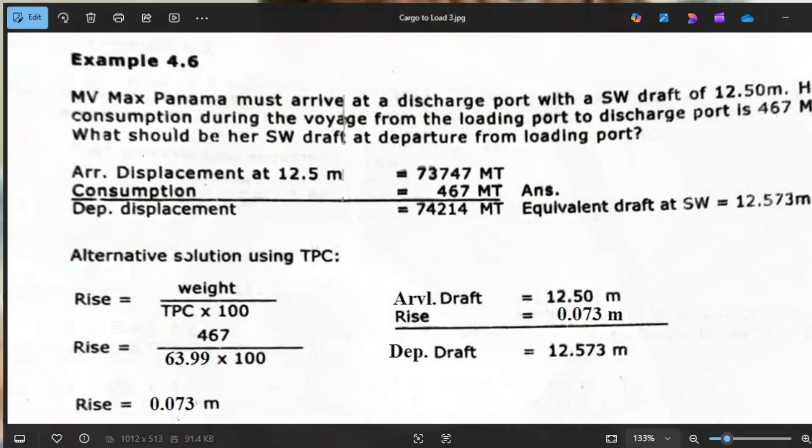So let's just read the question, guys. MV Max Panama must arrive at discharge port with saltwater draft of 12.50, meaning his arrival draft at discharge port is 12.50 meters. Her consumption during the entire voyage from load port to discharge port is 467, meaning at the time of departure from load port to arrival at discharge port, the consumption of bunkers or fuel oil, diesel oil, lube oil, fresh water is 467 in total metric tons.

The question is, what should be her saltwater draft at departure at load port? Meaning, what is his draft upon leaving the load port? Or what is his departure draft upon leaving the load port? Okay, so here's the solution.

He has arrived at discharge port with a draft of 12.50. What is the displacement? Displacement is 73747. So we'll try to double check this one, guys.

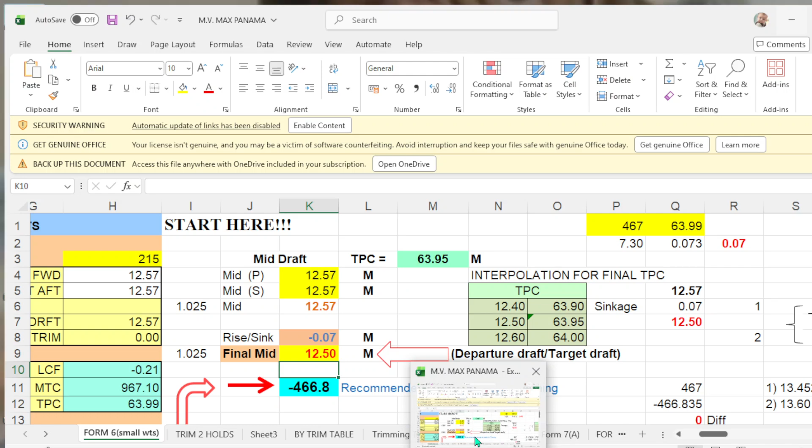Displacement is, go to the draft, 12.5. Just put here 12.5. Displacement is 73747.

Then you add this consumption of 467, which is this one. You add because you're going back to the load port. So you add 467 to the displacement of 12.50, which is 73747. You add this one, that will be 74214. So what is the equivalent of this displacement?

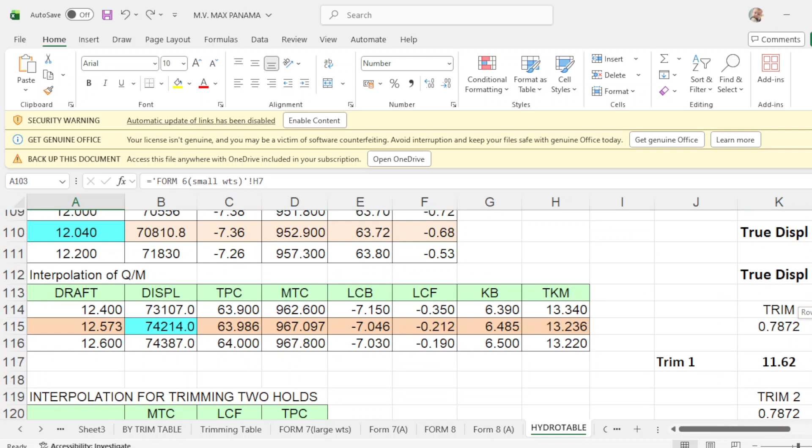That will be 12.573 in salt water. So we'll double check, guys. 74214. Push enter.

And that will be 12.573. So this is your departure draft at load port. From here, you consume 467 metric tons and your arrival at the discharge port will be 12.50.

And here's another solution, which is rise equals weight over TPC times 100. And what is your weight? It's 467, or your consumption. And what is the TPC of 12.5?

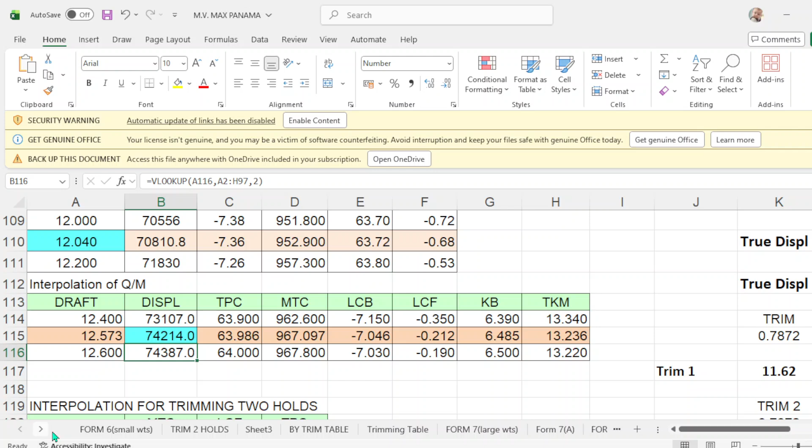We go to the program, here 12.5. We go to the hydrostatic table, say 12.5. The TPC of 12.5 is 63.95. The TPC of 12.5 should be 63.95, or I got to 63.99. Why 6399? I will explain you later. But I made it 6399. Okay, I'll explain it later.

I go to now. Alright, just finish this one first. So I got there 63.99 times 100. Your rise should be 0.073. And 0.073 plus your arrival in discharge port, this will be your departure in loading port of 12.573.

The same here, okay? Because with this figure of 6399, what I do is 467 divided by 63.99 divide 100, then you get this figure of 0.073 meters. You add this to your arrival drop at load discharge port, and your departure at load port will be 12.57. So I'll prove this by the program.

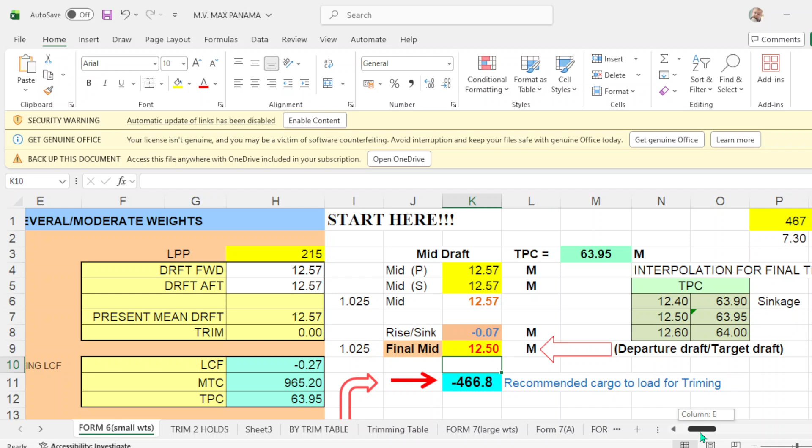Okay, so here, this is your departure drop at load port. Put here 12.573. Forward and aft is 12.573. And your mid port is 12.573. And your mid starboard is 12.573. And your mid drop will be 12.57.

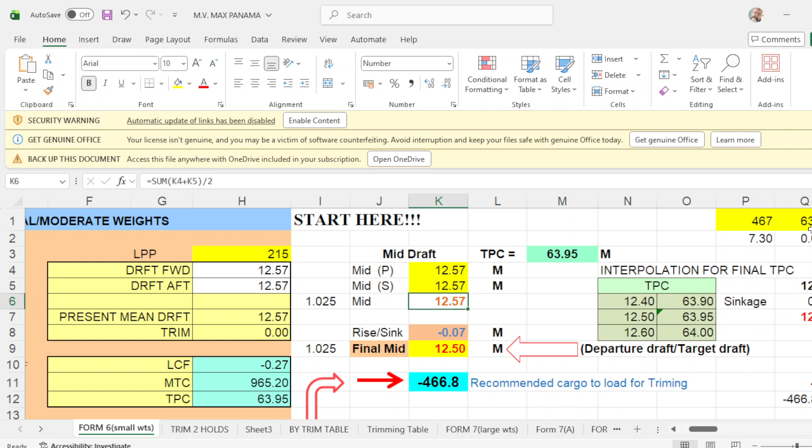Okay, take note, the TPC of 12.573 is 63.95. I got here 6395. See, I just put it here. And the weight consumed from load port to discharge port is 467. Okay, take out this first. So from load port to discharge port, consumption is 467, and the TPC of departure drop at load port is 6395.

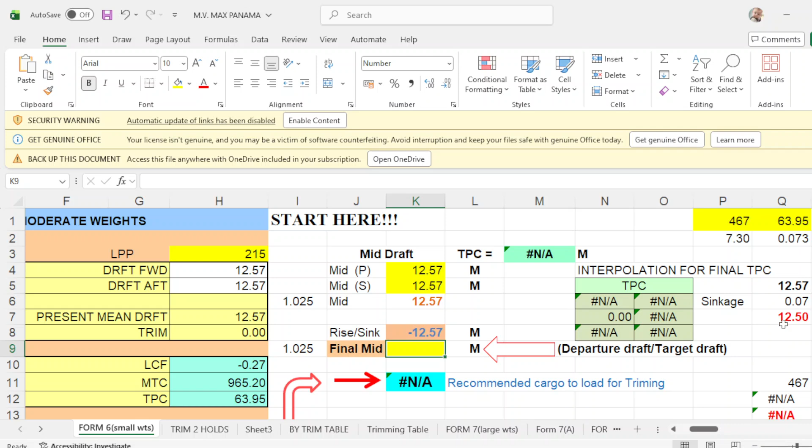So I put here 6395. So 467 divided by 63.95, that will be 7.30 centimeters divided by 100, that will be 0.073 meters. Okay, that will be in meters. Now I put here the, this will be the departure drop.

This will be your departure drop at load port of 12.57 minus your sinkage of 0.07, and this will be arrival drop at discharge port, which is, it says here, your arrival at discharge port is 12.50. Okay, so this is what I computed.

So since you have already know your departure drop at loading port, which is 12.57, which is the mean, minus this is your rise. Okay, this is not sinkage, this should be rise. Because the vessel will float or rise, it will rise because you're already consuming of 467 metric tons. So when you consume fuel oil, the tendency of the vessel is to rise. That's why you subtract this one and your arrival draft at discharge port will be 12.5.

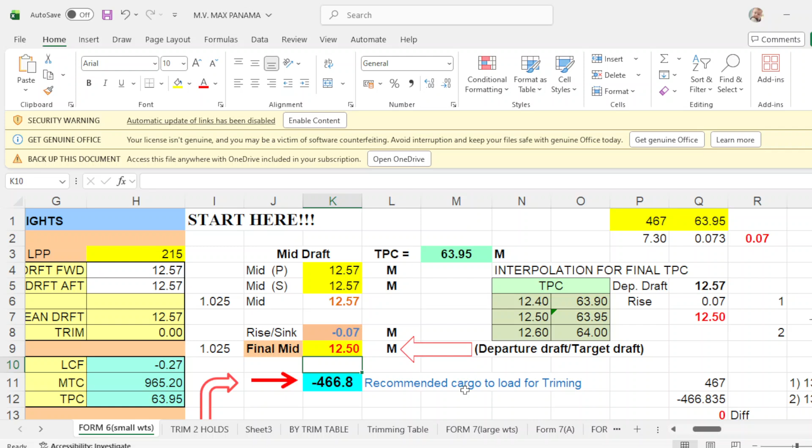Now, this will confirm that you will consume of 467 by the formula, by this formula of rise equals weight divide by TPC divide 100. Okay, for example, what is your weight? It's 467, put here equals 467 divide with your TPC of this one, divide by 100 with this formula and you press enter, your rise is 0.073.

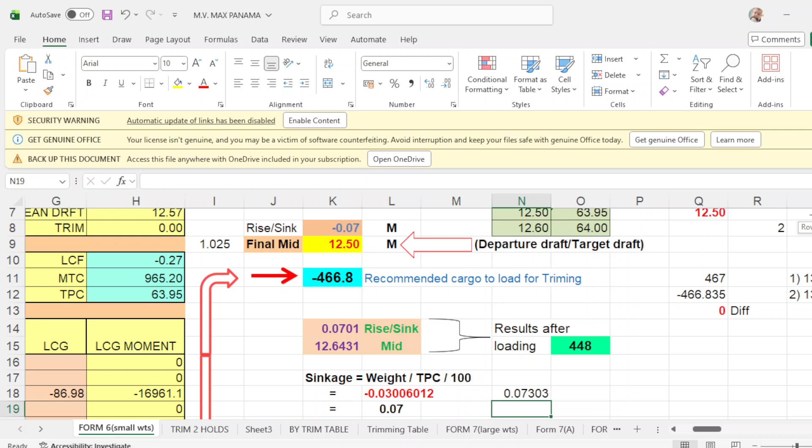Okay, or the same, that will be your rise, or this one. So the value that the sinkage will be 0.07. Okay, just take this out.

This is also the same formula with this one. Okay, let's say your weight is 467, 467, 467. Your TPC is 6395, 6395. Then you press enter. Then you will have 0.073, negative because it's rise.

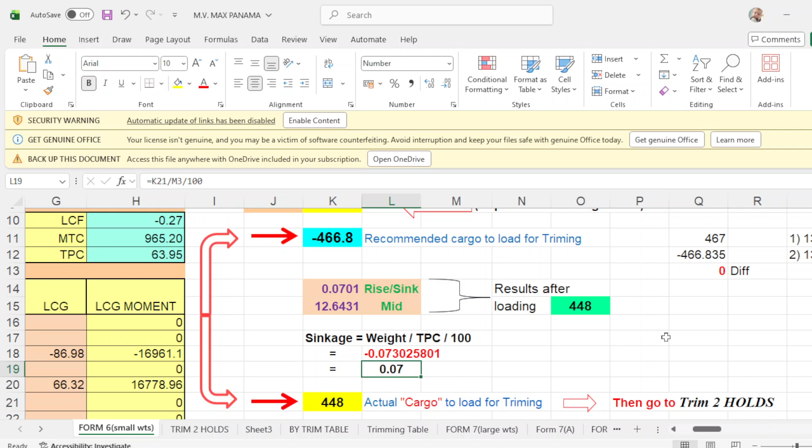Since you have already this rise, what will be the amount to be consumed from load port to discharge port? The formula is rise times TPC times 100. So what is your rise? It's K8, K in 8. And times M3, your TPC is M, this letter M, and 3, which is 63.95, the interpolation of your arrival draft in discharge port. With 12.5, you interpolate the TPC and you will get 6395. That's why I use M3.

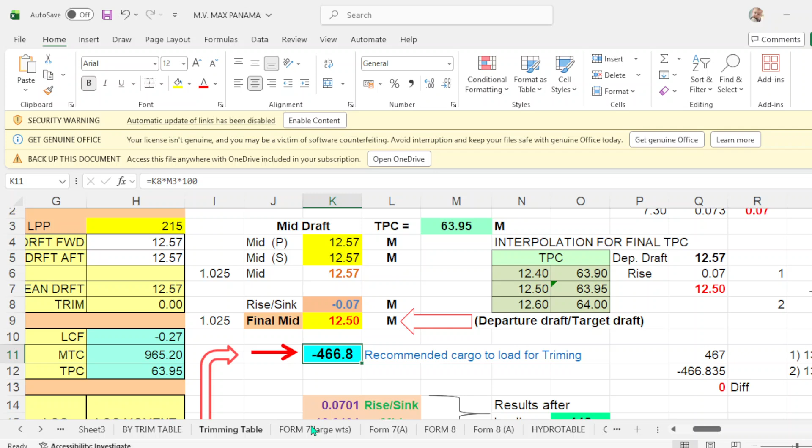Okay, I forgot this one. No, that will be number 12.57. Let's see, I think there's something wrong with this. Sorry, double check this one. This is for number 6. You put it equals, then you go to form 6. I'm sorry.

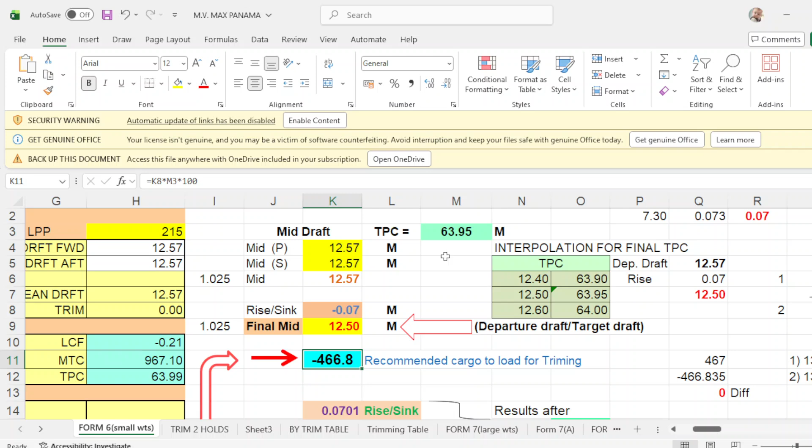Okay, again we go to the hydrostatic table. Excuse me, hydrostatic table equals, put equals here. We go to your mean draft of this one. This is your mean draft. And press enter. And your TPC should be 6399. Okay, that will be 6399. And your, okay, 6399. Put this to 6399, okay, 99.

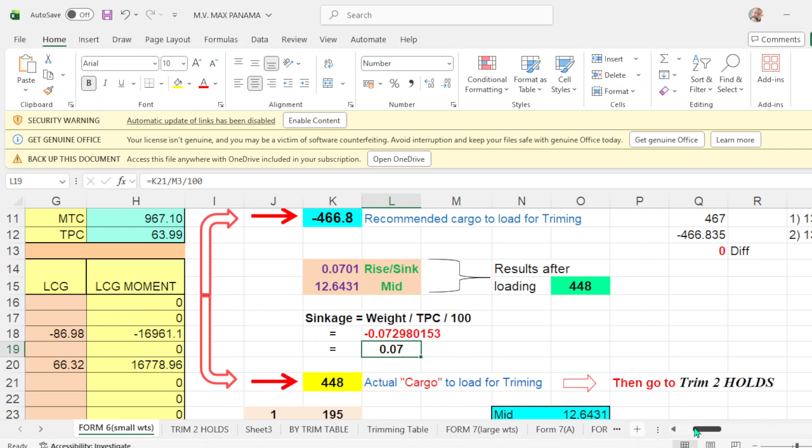You will still get negative 0.0729, negative 0.0729, okay. Again, this is to confirm that your consumption is 467 with this figure. Okay, how did I get this figure is...

Okay, it's your sinkage of 0.07 negative times M3, which is your TPC, M3 TPC of your 12.5 arrival in discharge port, times 100, okay. And the value will be negative 6447, 466.8, which is almost 467 if you round off. So this is just to confirm that this is correct. The consumption is 467.

Of the consumption now, we just follow this formula, okay. What happens if you consume 467, okay, so this is 467, you put 467, enter. That will be, you put negative, okay, because you're consuming, negative.

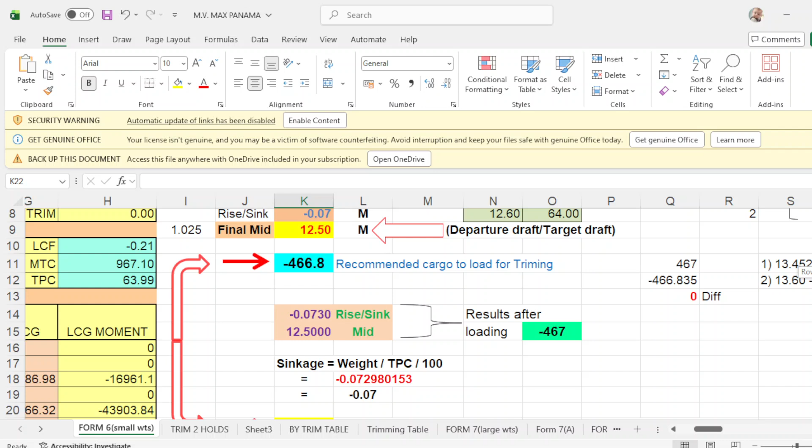Then you will get the exact draft. When you consume 467 metric tons, your mean draft arrival in this port will be 12.5, the same, and your rise is 0.073, negative, which is almost the same here, 07.073. Okay, so this is confirmed now that this is the consumption of 467 is correct, that we are to consume from load port to discharge port, and your arrival at discharge port will be 12.50.

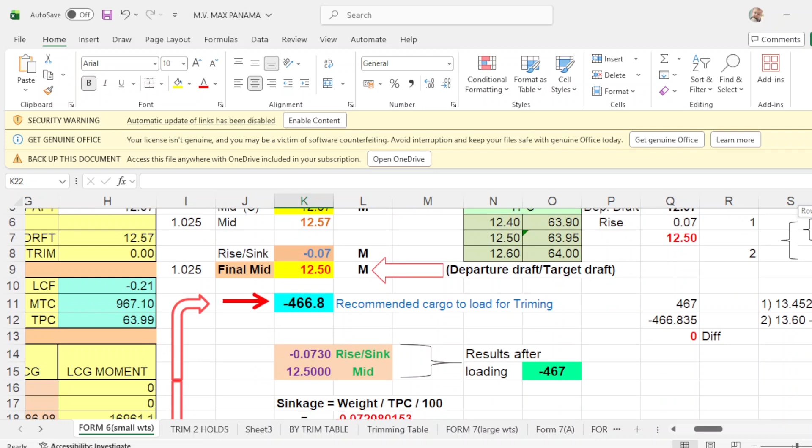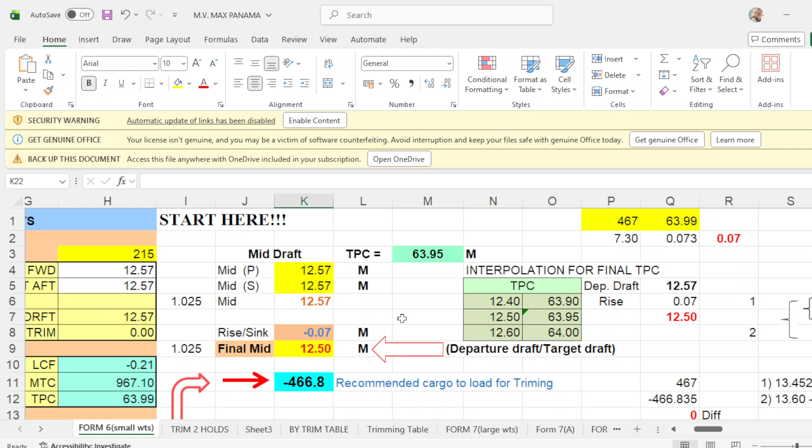Now, for example, instead of using bunkers, fuel oil, lube oil, fresh water, we will try to use the cargo, okay. So in cargo, you go to trim 2 holds, okay, you go to trim 2 holds and take note of the remaining cargo or the weight, which is negative 467, and this is your initial draft or your departure at loading port, okay. This will be your mean draft also. This will be your TPC, LCF, and MTC.

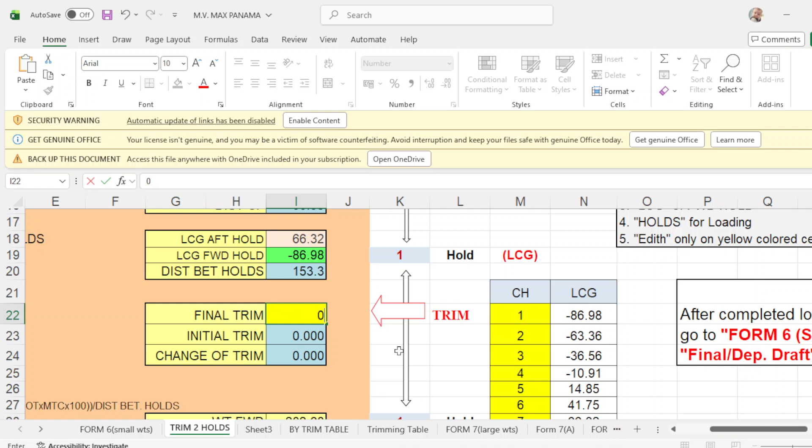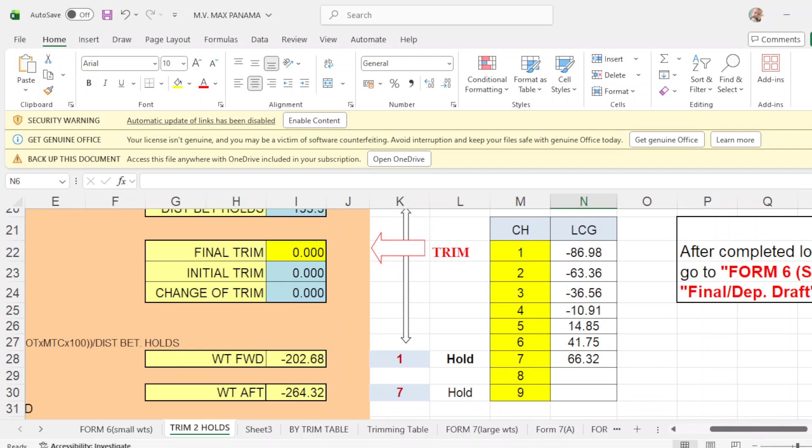For example, you want to discharge in 1 and 7 to arrive at 12.5 at discharge port, okay. So you say 1 and 7, and you want to arrive at discharge port at even keel. So you put no trim, that will be 0, okay. And how much would you discharge in hold number 1? He says you discharge in hold number 1 of 203, so round it up, you put here 203 negative, 203, because you're going to discharge cargo. And number 7, you're going to discharge 264 of weight of your cargo, 264, okay. And your arrival in discharge port will be, for example, 12.5 forward, 12.5 aft, trim 0, and 12.5 mean.

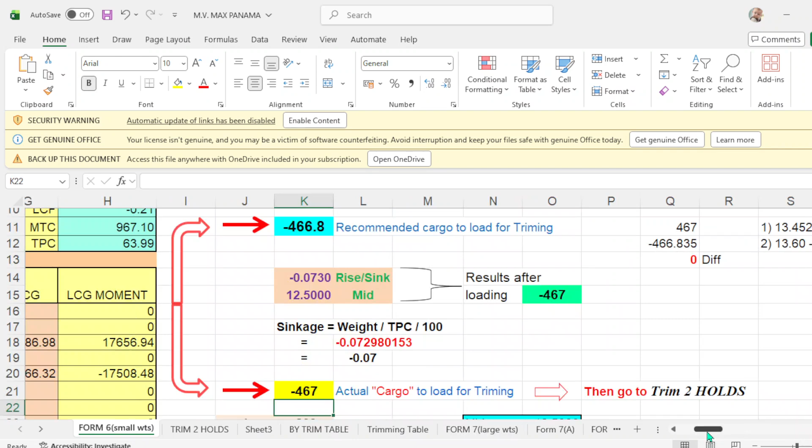And this formula, or this program, is how to find trim when handling several moderate weights. This is your departure in your load port, and this will be your arrival. So in number, take note, in number 1, you discharge 203, you have 203 here, and you put the LCG, and number 7 is 264, then you put the LCG, and your arrival at discharge port will be forward 12.5, aft draft with 12.5, no trim, and mean is 12.5. Okay, then you have here 0 difference because the mean draft and mean draft are the same.

How did I get this mean draft? You put this equals, okay, then you go up.

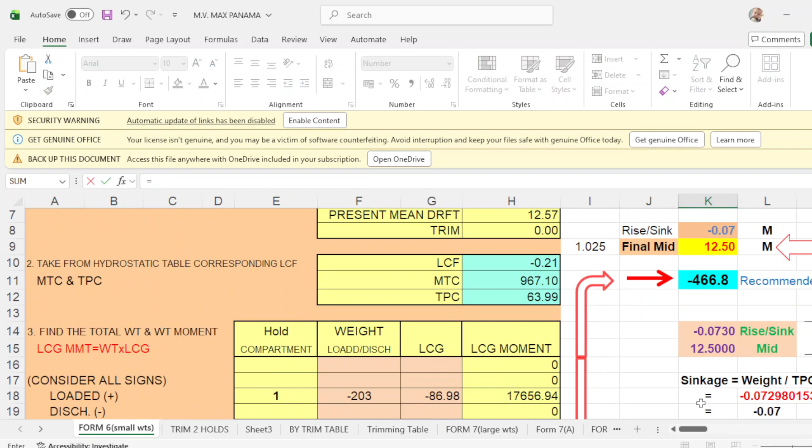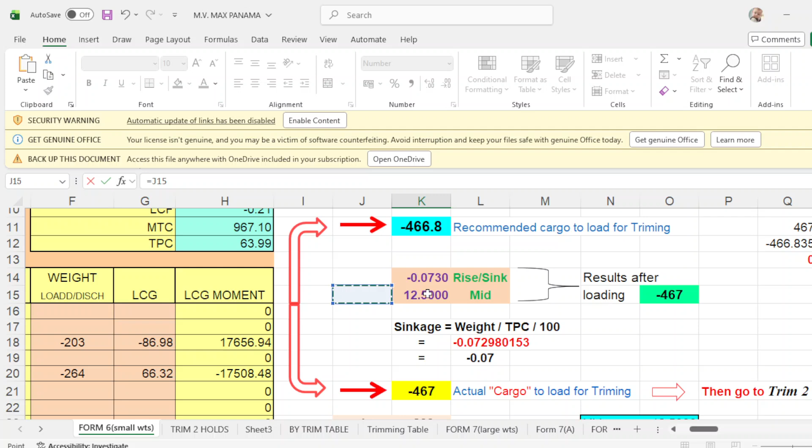This will be your mean draft because you already discharged 467. Click this one. That one and enter, then you will have your mean draft. And your mean draft equals this. Enter, and this exactly, difference is 0, 0, okay? This is how good this program is. This will show you how this program works.

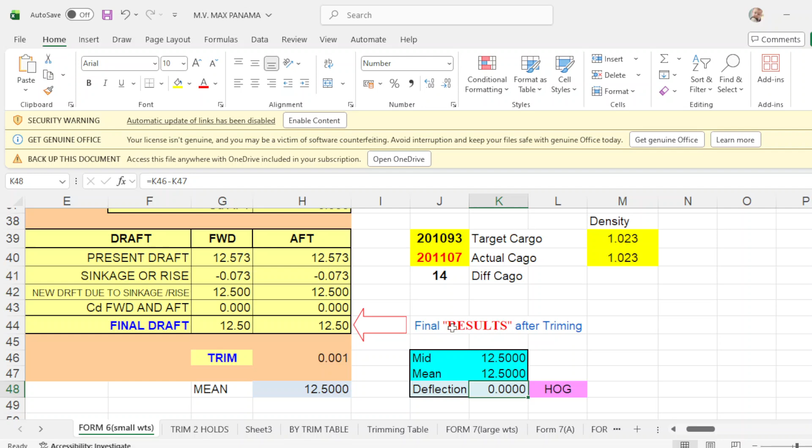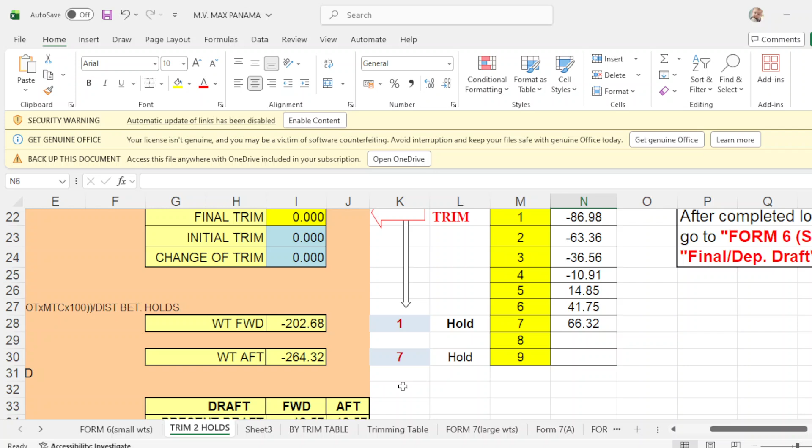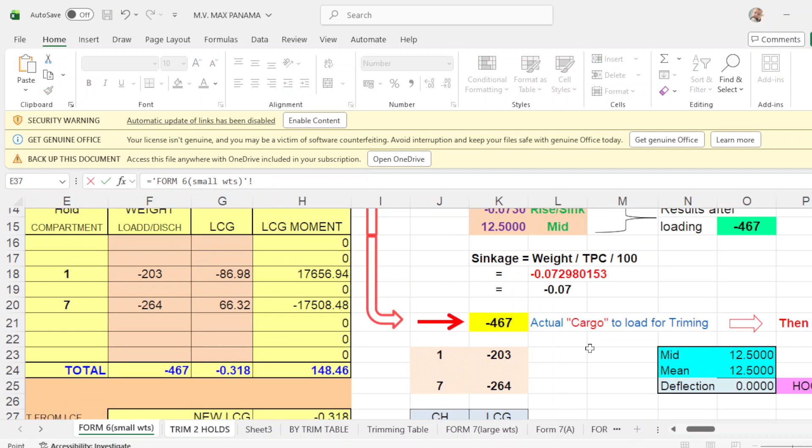And trim 2 holds, this is your cargo to be discharged in hold 1 and 7. We have already going to discharge number 1 of negative 203 and number 7 is negative 264. Upon discharging this 1 and 7, your forward draft will be 12.5, aft draft will be 12.5, 0 trim, and mean is 12.5, almost 0, almost the same. Deflection is 0. Again, how did I get this mean draft? You put equals, I press equals, then you go to form 6, you go up, and click this one. Enter, this one, and your mean, press equals, then this is your mean, enter, and so you have a 0 deflection. Then we go to the trim table.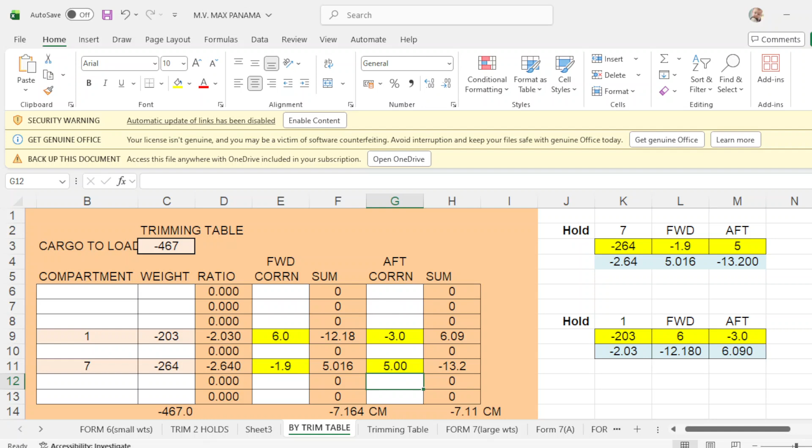Take note, trim table: you have to discharge 467. In number 1, you have to discharge 203. Number 7, you're going to discharge 264. In your hydrostatic table, look for the forward correction of hold number 1, which I put here as 6.0, aft is negative 3.0, and 7 is negative 1.9, and aft is 5. That is in meters, and your departure, arrival draft, load port, discharge port is even keel of 12.5, and your deflection is almost 0.

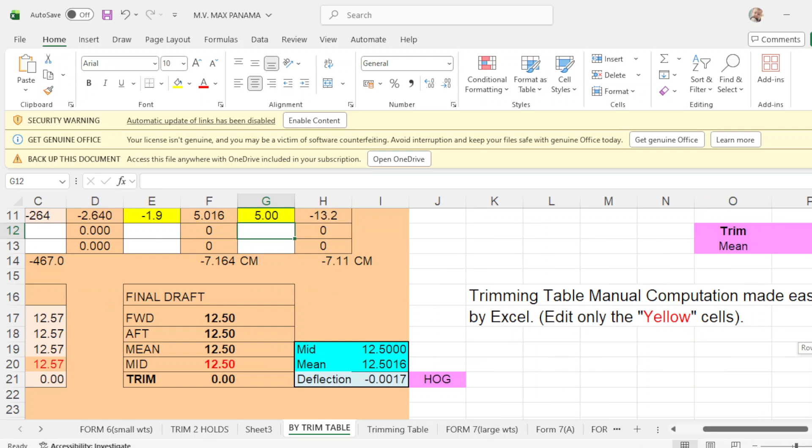This is the reverse. Instead, you have to discharge first in number 1 so that you will have a good trim. But this is discharge. If you are going to load, you should load in number 7 so you will have a good trim. Then you load in number 1. But this one is the reverse, because you are going to discharge. That's why I never changed the sequence of the loading.

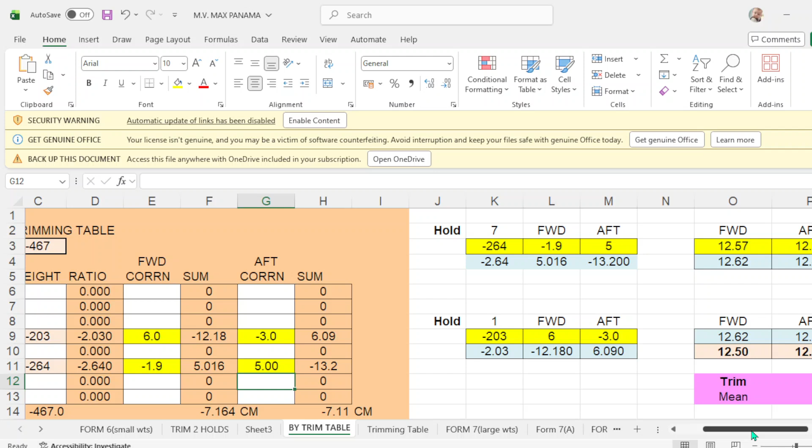But anyway, if you are going to discharge in hold number 7 of 264, which is the same here, the same correction forward and aft. Number 7 is 1.9 negative and 5 meters here. After you complete discharge in number 7, you discharge in number 1, and the weight is 203, which is the same here. Forward correction is 6, you have the same here, 6. Aft correction is negative 3, negative 3. So this is the initial draft of 12.57 in the load port.

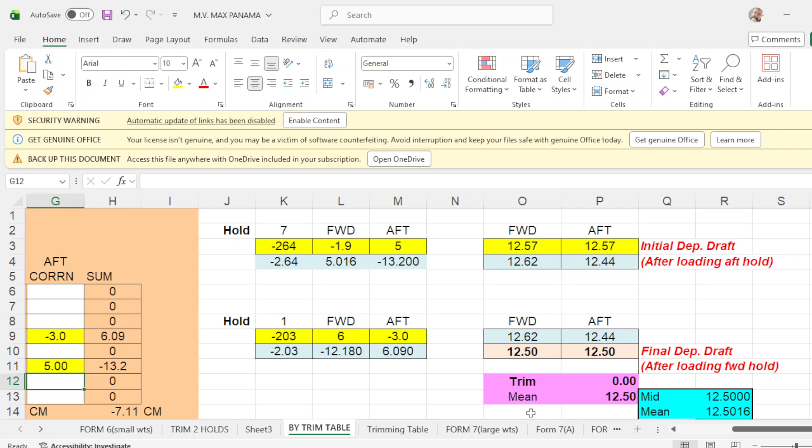After discharge of 264 at hold number 7, this will be your draft of 12.62 forward, 12.44 aft. You are trimmed by the head. Then you discharge in hold number 1 of 203 metric tons. Upon completion of discharge of 203, your forward draft will be 12.5, aft draft will be 12.5, you have 0 trim, and mean draft is 12.5, and your deflection is 0.

So we have 4 programs: form number 6, trim 2 holds, and this is a trim table. Then the last one is how to find draft and trim when handling weights involving large changes in mean draft.

Remember, the program, the vessel is floating in seawater. So also in the discharge port, loading port, also seawater. Okay, you go to the program. So 12.5, this is your arrival in discharge port. With 1.025, 12.5 here, forward and aft is 12.5.

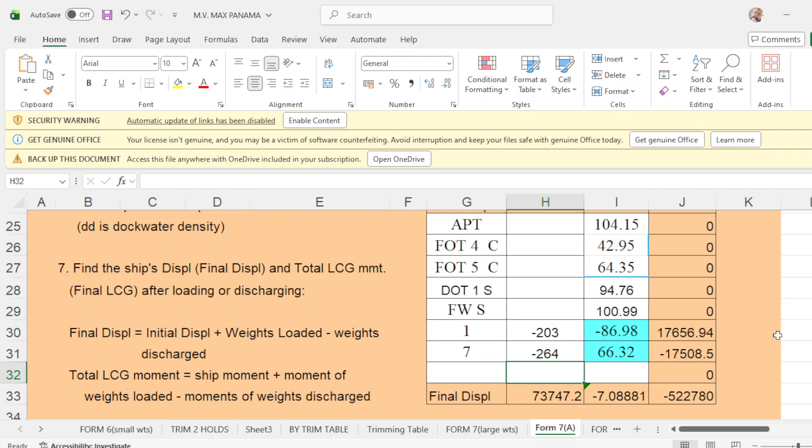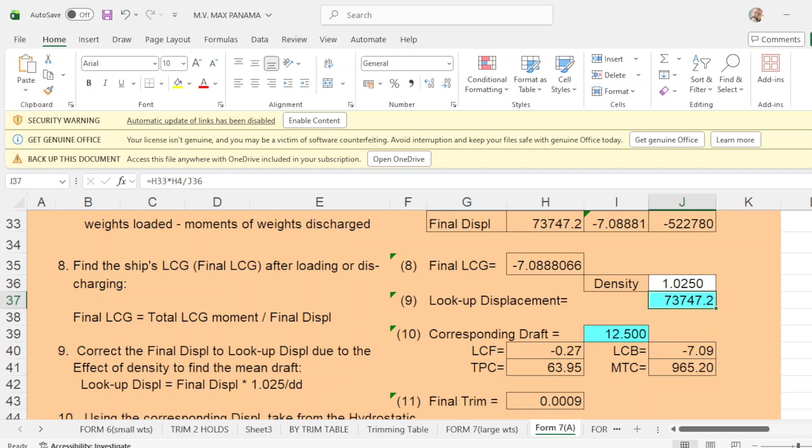Okay, we just put this 12.57, this will be 12.573, this will be 12.573. This is your departure from load port. And you discharge in number 1. How much you discharge in number 1? Negative 203. You put negative 203 because you're going to discharge. And number 7 is negative 264. So discharge negative 264. And your final density in arrival at discharge port will be 1.025. Your arrival draft at discharge port will be exactly 12.5 forward, aft is 12.5, mean draft is 12.5, and you have a 0 trim.

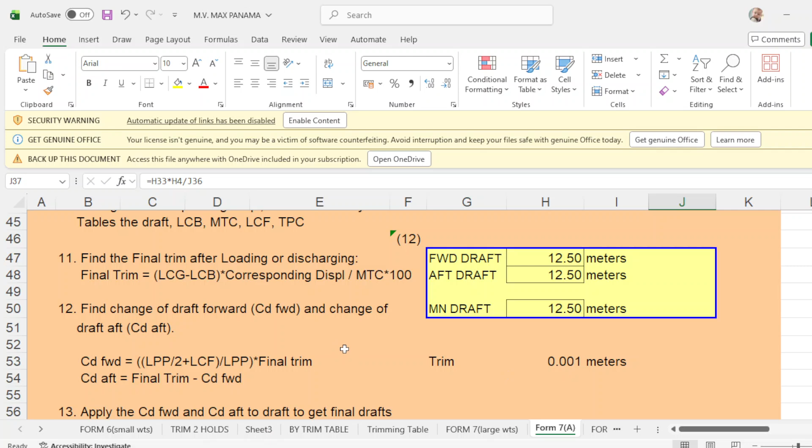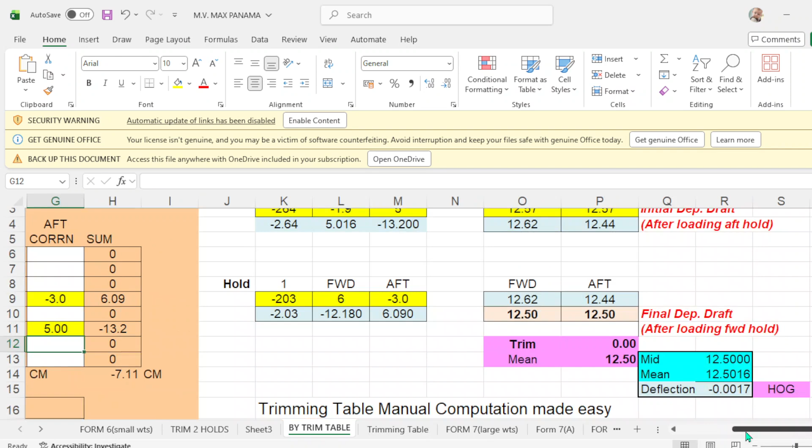So you have 4 programs. This is form number 7, which is how to find draft and trim when handling weights involving large changes in mean draft. Then you have your trim table. Your arrival draft at discharge port is even keel of 12.5, mean 12.5, and 0 trim. And you have 0 deflection.

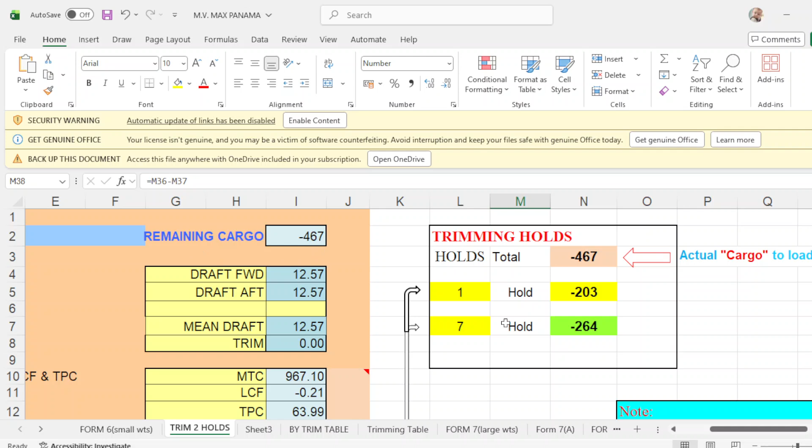That's number 2. And number 3, trim 2 holds, trimming cargo. This is your cargo to discharge. This is your trimming hold. And your arrival at discharge port forward is 12.5, aft is 12.5. 0 trim, mean draft is 12.5, and you have 0 deflection.

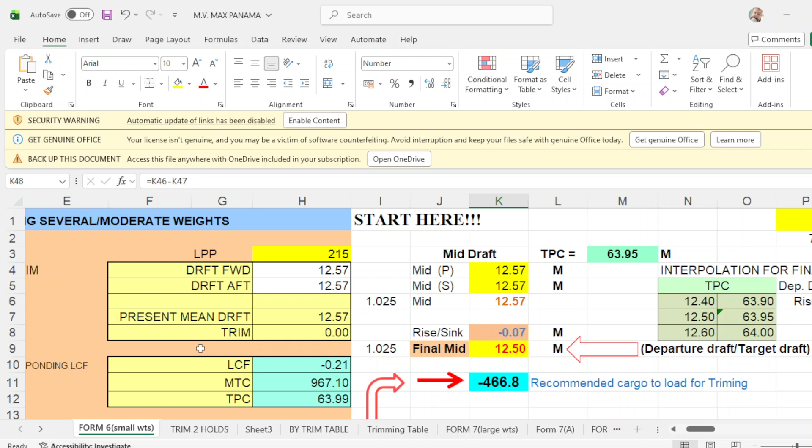And now lastly, number 4, which is form number 6, which is how to find draft when handling several moderate weights. Here you discharge number 1 of 203, number 7 of 264, and your arrival draft at discharge port will be 12.5, forward and aft will be 12.5, and your trim will be 0.1, 0 trim. Your mean is 12.5, and you have a 0 deflection. Exactly the same here.

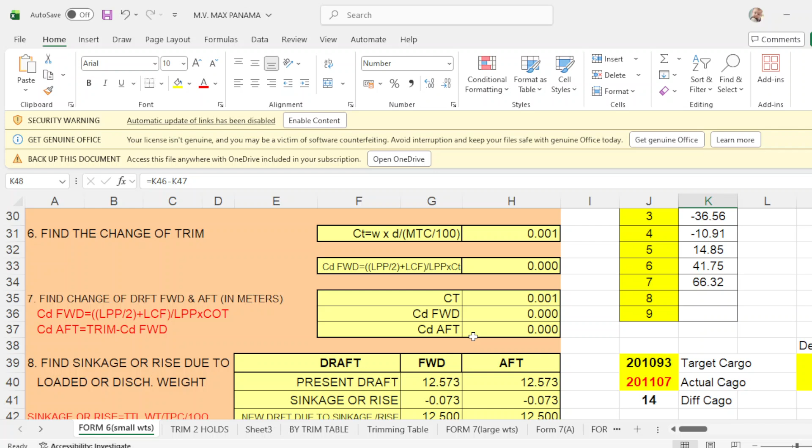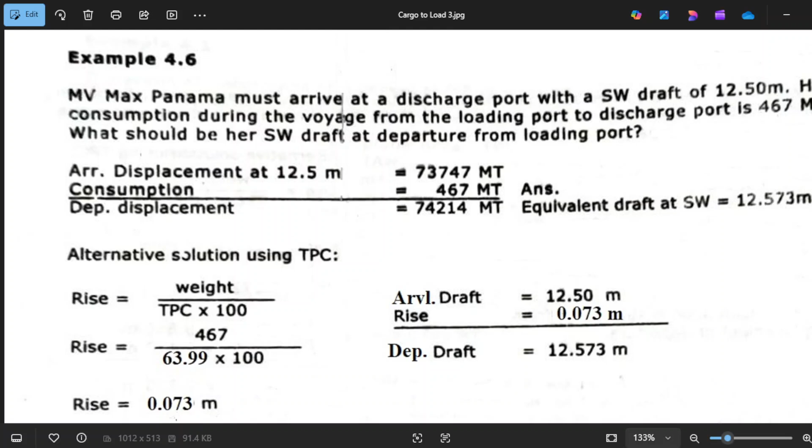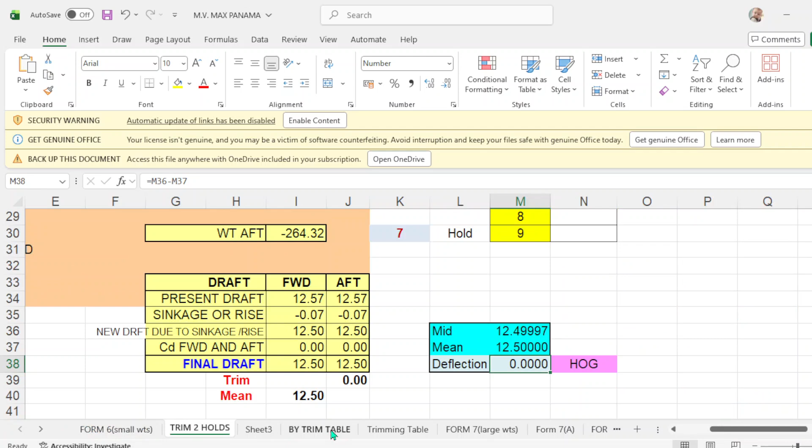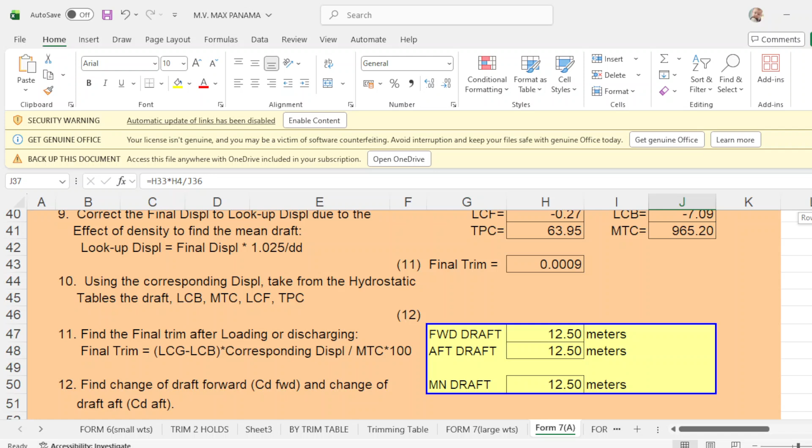So this program is only for double checking if your answer is correct. But the solution manually is this one. This is the first solution. This is the second solution. But if you want to prove it by the program, you have 4 means of counter checking it: by form number 6, trim 2 holds, by trim table, and form number 7 involving large changes of mean draft. And your draft is even keel of 12.5 and 0 trim.